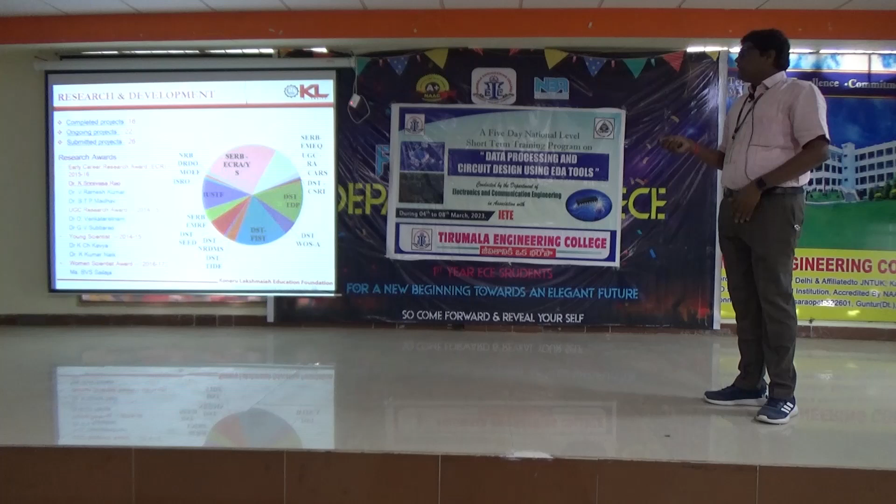So we are the leaders for these specializations, and we have a head of department. After the head of department there is a principal, and after the principal there is a VC. The department is meant for research in KL University.

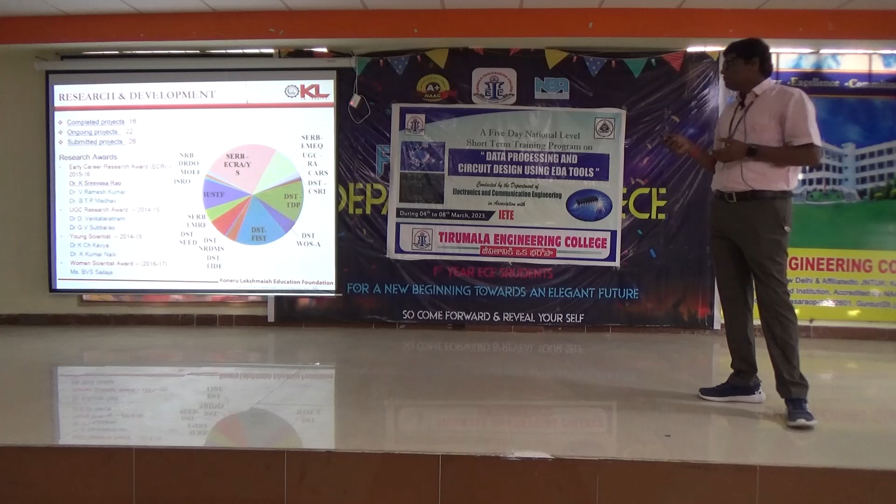The EC department is purely research oriented because we have so many faculties from IITs, faculties from NITs, and faculties from other institutions. So we have huge research projects in the department from different funding agencies.

This is about my department, where I am working, that is my habit to discuss. Wherever you go outside, you will discuss about your family, right? So my institution is like my family, and wherever I am working, I should always represent my institution.

After that, let us discuss today's talk, which is about the nanoscale transistor. And I always believe this statement about research.

What is research? Maybe you are at second year level, third year, fourth year, or maybe PG level. Research is not something entirely new. The students we have in our institutions, third year students are doing a lot of research, working on many different kinds of projects. Final year students are also working on projects.

Research is always about seeing what everybody else has done, what others have done. We should know about what others have done, and we should be in a position to do something new which is not done by others. That is research.

It is not something like an innovation which is not available anywhere else. No, it is not like that. The transistor has been there since 1947 onwards. Still we talk about the transistor, and we say we are doing research, meaning the transistor is the same but inside we are making some modifications. So making small changes in the process is also research.

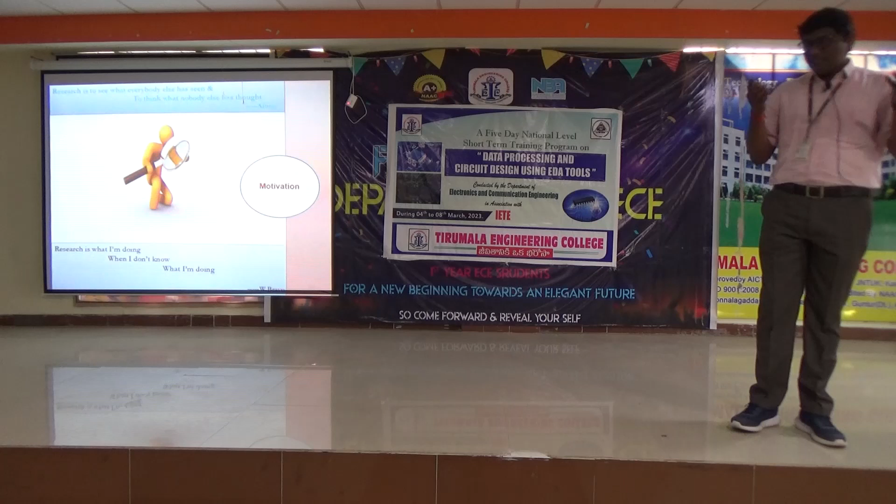Research is also what I am doing when I don't know what I am doing. My scholar here, once upon a time he was a faculty member here, Mr. Shaukat Baliga, joined for PhD and worked for some time. He did not understand the problem, but now he is in a position to understand his problem and understands what research is and everything.

And he is the senior professor in the department, though it is now headed by others. We used to take inputs from people. He is the man from IIT Kharagpur, and he is the knowledge hub.

If you use it, you will get the knowledge. If you can't use it, then wherever we see, it depends upon us how we can utilize the services, how we utilize the resources. If you feel others are waste, we are waste. Simply, if you are learning something from others, definitely you are learning something new.

Last day, two professors came from NIT. They are from NIT, I am from KL University. If you feel like, I am waste compared to NITs, I am not in the NIT category, I am in a private institution. But what you need to see is what they have taught, what I am teaching, what you learn from them, what you learn from me is the matter.

Institution is only the label.

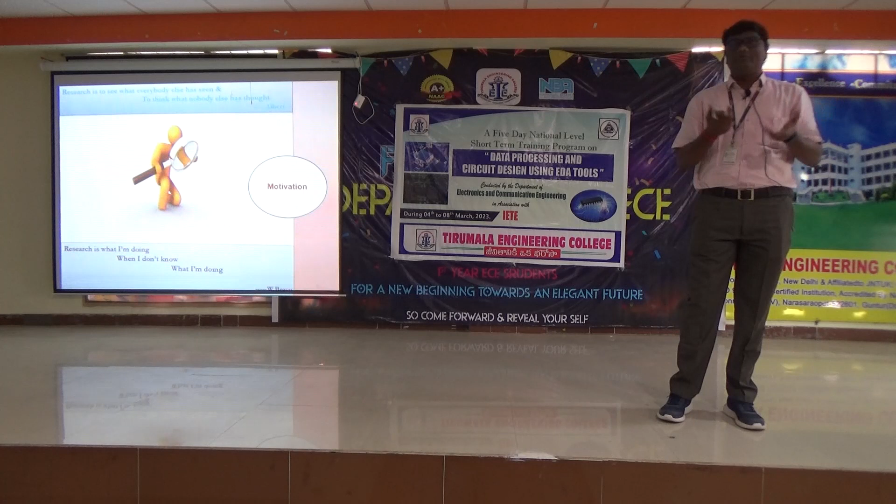Tomorrow you will go outside, you are from TEC, and some people joining the same industry will be from IIT. No issue. What knowledge you have is the matter, obviously. Due to so many circumstances, you are joining here, otherwise you could be there in NIT or IIT. Every person, everything in the universe is valuable and is a matter. I always believe that, and I convey the same to my research scholars and my students.

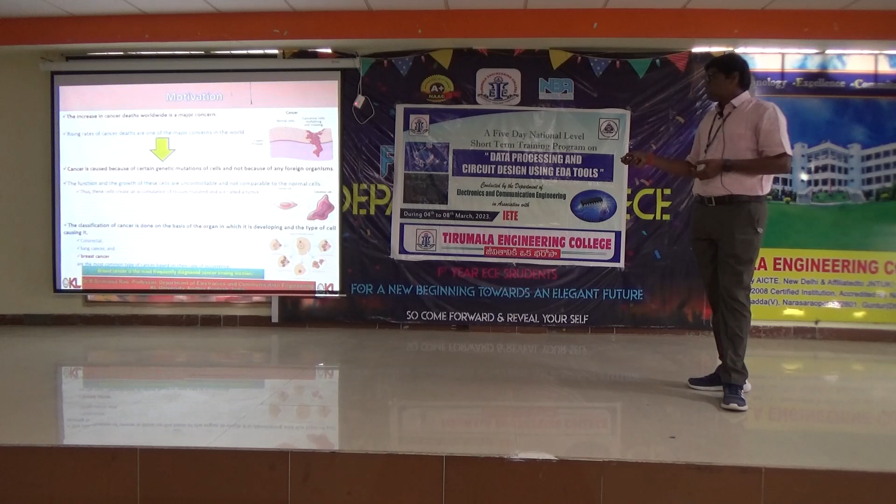So this is the problem. This is the human tissue, the human body tissue. If you cut, you will see both the layers. This is the normal layer where the cells are in a regular pattern, and this is another kind of tissue. There is one line, which is the barrier. We have a skin, and inside skin there is one more skin, and inside that there is one more skin, and after that there are so many nervous systems. So these are the tissues.

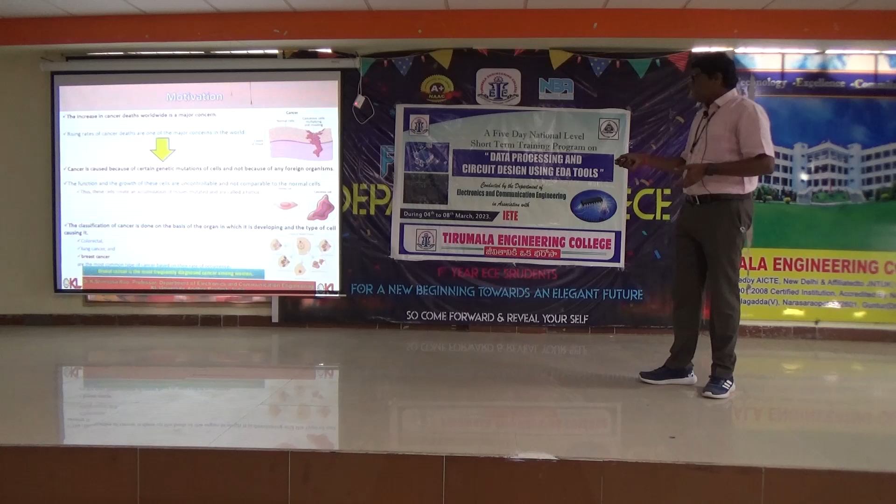If you have a tissue like this, no matter, both tissues are good, they are working properly. Your blood circulation, everything inside is good. But if you get this kind of disorder in the tissue, it is affected by some kind of mutations in the cells. Some kind of virus, or some kind of unwanted cells, are there in between these two tissues.

So in the human body, when we have this kind of problem, we can say that the human body is facing cancer. It may happen in so many parts of the human body - in the lungs, or other locations, which is the main concern in the overall world. Getting solutions to detect these kinds of cancer cells is the main concern in the world, because the death rates are increasing like anything. There is no pure solution for such a disease that affects the human body.

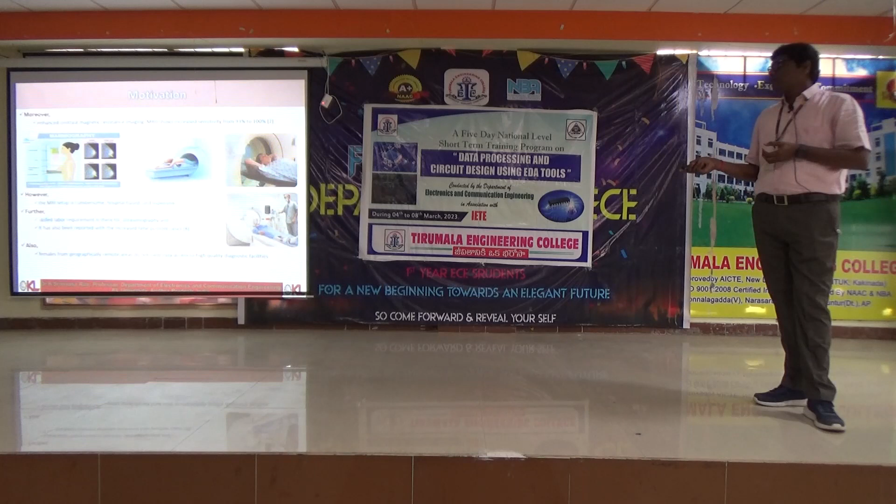Understanding all these difficulties in this process, being an engineer, there should be some kind of solution required for these problems.

Usually when we face this problem and go to the hospital, they do the X-ray mammography. After half an hour, they call you for the report discussion, and they get these kinds of images. From these images, the doctor understands whether the cell is present or not. If any signal processing or image processing people are here, they can understand the image—but a lot of knowledge is required to understand it. Based on this, the doctor will give you some kind of suggestions.

Sometimes during this experimentation process there will be false reports also—reports will come with some other name or other mix-ups. So this entire process is cumbersome, and patients get a lot of doubts about whether the report is correct or not. All this created some limitations of the present hospital processing.

This is expecting something from the engineering background—some kind of portable device for the same cause. It may not give you 100%, but some kind of portable device is expected in society from the engineers. Therefore, transistors can do this job—the transistors we are studying, which are tunnel-based transistors, in short called TFET.

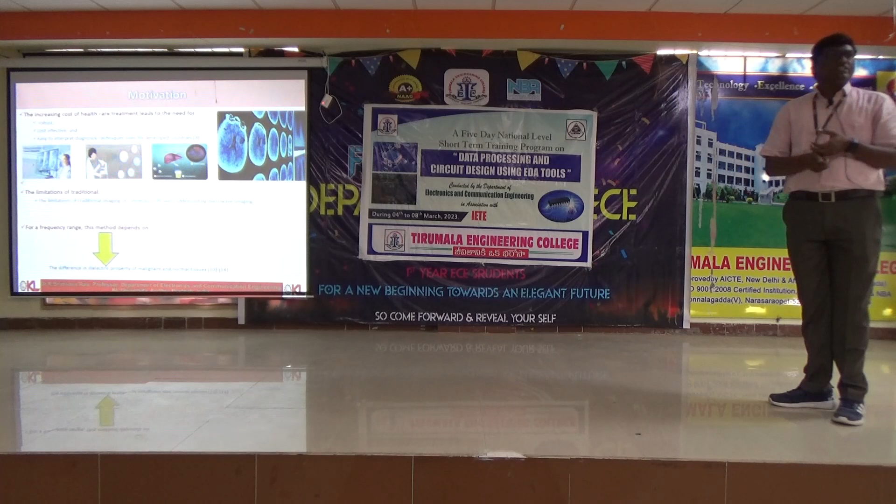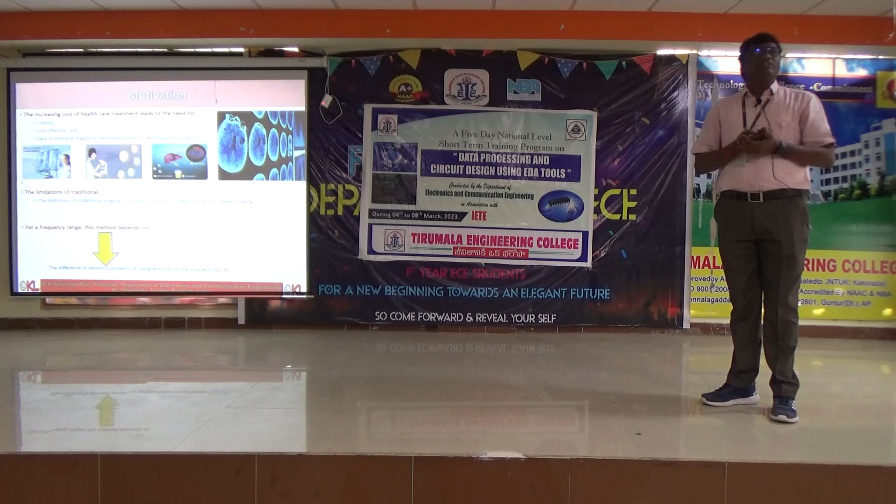So here these images are coming and these are connecting with the frequency range. X-ray mammography can process a lot of samples. Every sample is not the same - some samples have different kinds of tissue thickness. Depending upon the thickness, they go for different kinds of radiations, and if they go for different radiations, the frequency will be different.

From this experiment, it is already proved that breast cancer tissues are exposed to microwave radiation. If you pass microwave radiations, these can be detected. This is already experimentally proved.

From that we understand that whenever we have a cancer cell, it gets more water content. Therefore once the radiation falls on this particular cell, it will be scattered - the scattering will be more when radiation passes through this tissue. Whereas a normal tissue has less water content, so when the radiation goes through, it will not be scattered much.

So the easy understanding is: microwave radiation goes and falls on the sample, and immediately technicians can observe the radiation and its scattering. If there is more scattering, it means there are some sort of cancer cells there. If there is less scattering, that is a normal tissue.

Depending upon the processing of this scattering of radiation, they understood that normal tissues have less scattering and cancer tissues have more scattering. More scattering means the permittivity and other electrical properties get changed because of the radiation passing through the cells. So the entire cell's properties get changed, and among them one property is the frequency, which connects with the dielectric property.

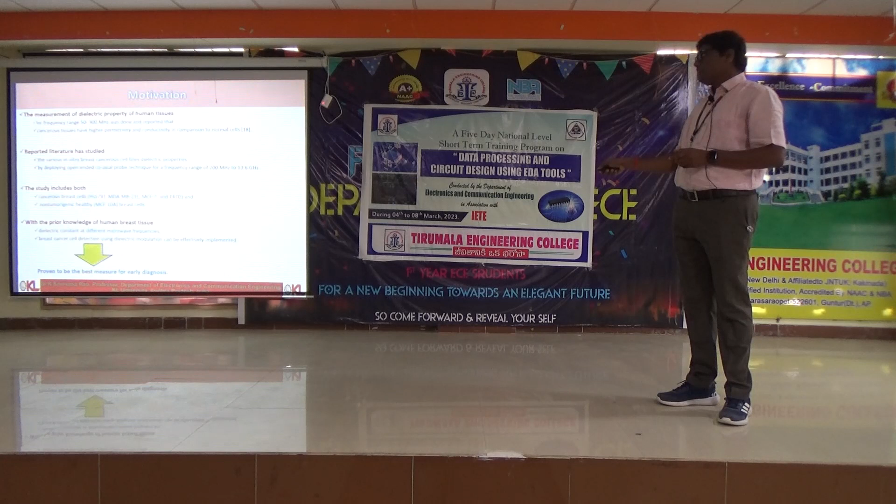We have taken the help of experimental data, and we have used these cancer cells: breast cancer cells like HS578T is one type, MDA MB231 is another type, and MCF7, T47D - these are 4 different types of cells we have taken into account for this experimentation, already mentioned here in reference number 18.

It is already experimentally proved that at this particular frequency, these particular cancer cells have been diagnosed, and also the normal cell - if it is the normal cell, this is the normal. We have taken these 5 kinds of cells, normal cell and breast cancer cell.

We have used our particular nanoscale technology with the help of the transistor, and we have diagnosed our cancer cells with these, and whatever transistor we proposed with some architecture, that is the best way one can get the solution. That is the entire way of our research.

Why are we going for the transistor? Because a transistor is very small. Nowadays it is available in terms of nanoscale, meaning very small. When we go for miniaturization, then the cost of the device will be reduced, and you can move with the device.

Earlier laptops were not available, very big computers were available for the same purpose, and we could not move. Now we go with mobiles, tabs, laptops. Laptops also - Samsung will have one kind of weight, and Intel based or iPhone based, they have one kind of weight.

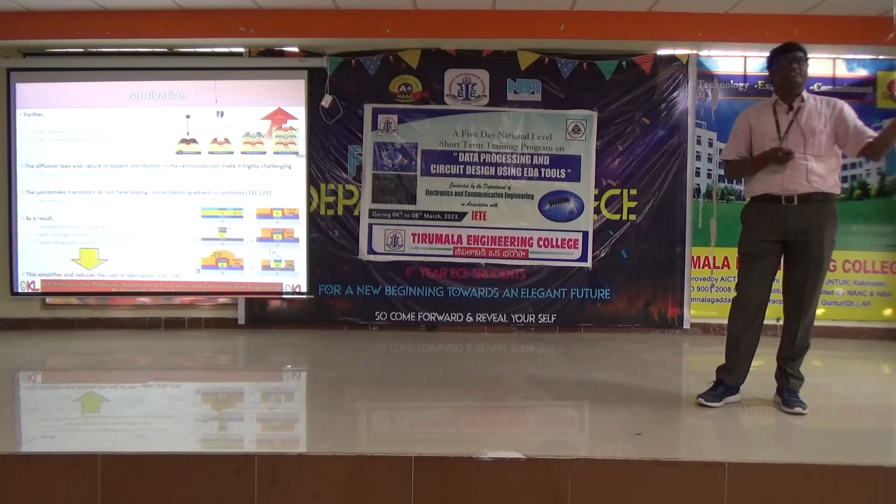That's why here we are going for transistors for the purpose of identifying or detecting cancer cells. Already X-ray is there - the X-ray machine itself is almost half of this dias, the equipment itself. So instead of that, we are going with one transistor, what we normally see in the labs also - transistors. Not exactly the same, but it is the same kind of device.

So 10 nanometer size, the channel length is 10 nanometer, 7 nanometer, 5 nanometer, people are doing. Such a small scale device being able to detect such very dangerous cells is the innovation - it is the research.

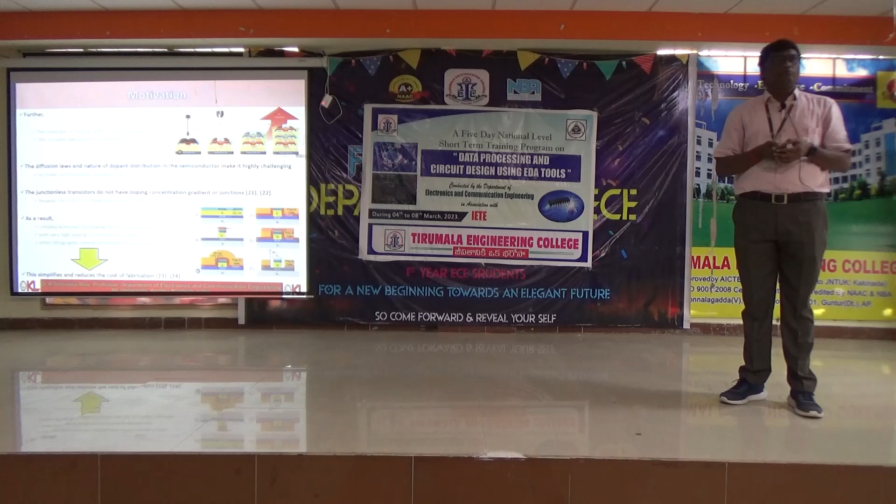That is actually our main intention, and in this process we have used CMOS technology like lithography, oxidation, etching process and all to make our device, but we are not doing it experimentally. The device is considered on CMOS technology basis. We are assuming some kind of architecture and we have simulated and designed that.

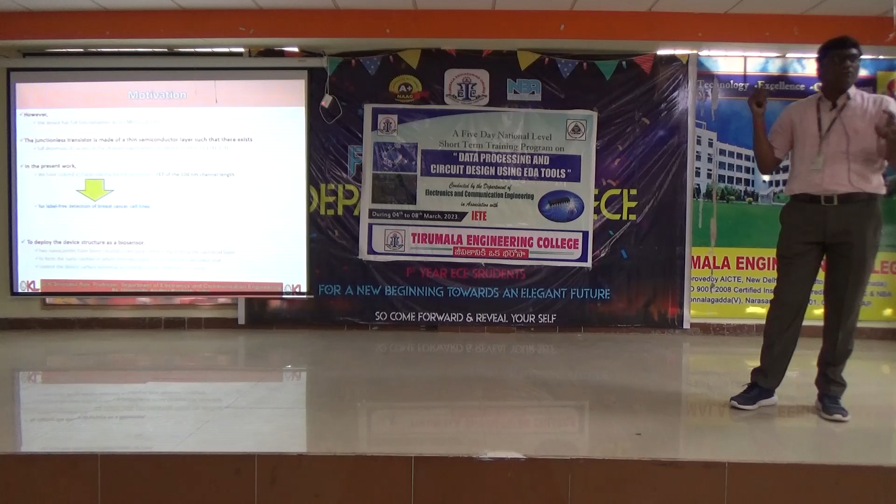Experimentally in the EDC lab, you must have a diode, you must have a transistor, and you give input and test the output. But here, we are not doing any experimentation. We have taken the data from the experimentation and we are using the software tool, which is the EDA tool. The title of your seminar is also the EDA tool - electronic design automation. So we are using this EDA tool here, and we are making this junctionless transistor, which is based on the semiconducting layer.

The device will be on condition and off condition. Whenever it is on, how is it going to respond when you give some sample as the input? We are not giving only the input voltage and output voltage or output current. We are giving some sample into the device, and the device is sensing it and providing the output. That's why this transistor is called a sensor, because it is sensing. This is the process we have observed.

So we are taking a sample from the human body in terms of blood and other forms, and we are considering that as the biomarker, and that is the sample. The sample we are injecting into the device. This is the transistor device.

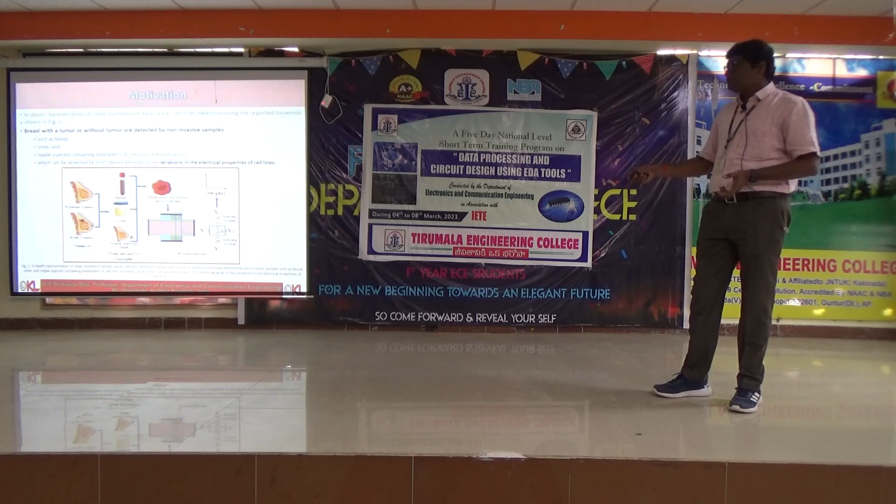And if you look into this device, this is the design of the transistor, and this is the proposed architecture. One can make the design in multiple ways. I can take source and drain, with the channel in between. Somebody can take drain and source arranged differently - drain on this side, source on the other side.

And somebody can take the oxide layer as HfO2 on both sides. Some people can go for silicon oxide, or tin oxide, and so on. So there is no limit for the design. As an electronic engineer, you can design your device as you wish, but ultimately your device has to respond to the purpose.

So here my proposed device is junctionless because there are no junctions. There is no junction between the source, drain, and channel. And the cavity is formed here. You can see this is the cavity where we can inject our sample.

We have cavity on both sides. We have a gate at the top side, that is the front end, and a gate at the back end. That's why it is called the dual gate or double gate transistor. You can make the transistor single gate, double gate, or multi-gate, which is called the nanowire based transistor.

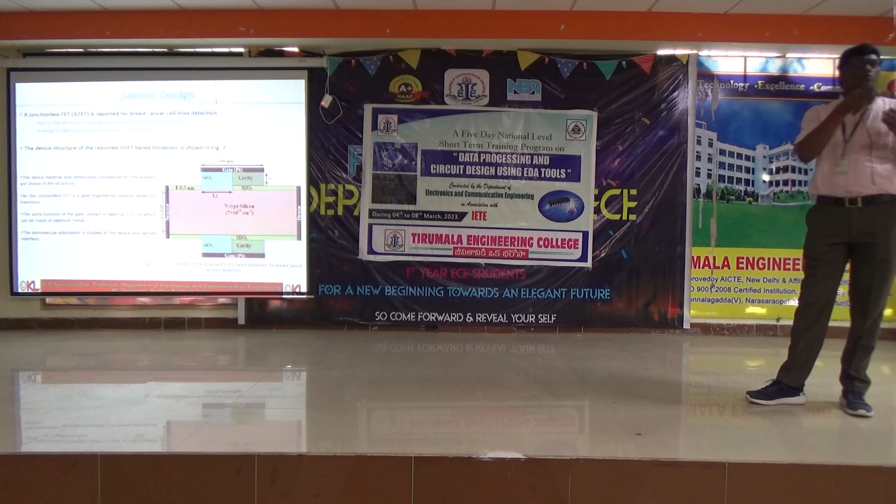Your gate will be surrounding the channel, which is called gate-all-around. So as you apply gate engineering, you are going to improve the output of your device. When more gates are used, controllability will be more, therefore your device will work perfectly. That's why I have used 2 gates here.

One can also use a single gate. The dimensions are mentioned here: 100 nanometer length is the gate, which has the cavity at 50% and oxide layer at 50%. Both sides we have done the same. And we have the oxide layer, with thickness of 0.5 nanometer. You can give 1 nanometer, you can do 0.6.

From the literature, it will come to our mind how much we provide, therefore we will get the better results. So based on that knowledge, we have given proper dimensions to the device. We have designed the sensor.

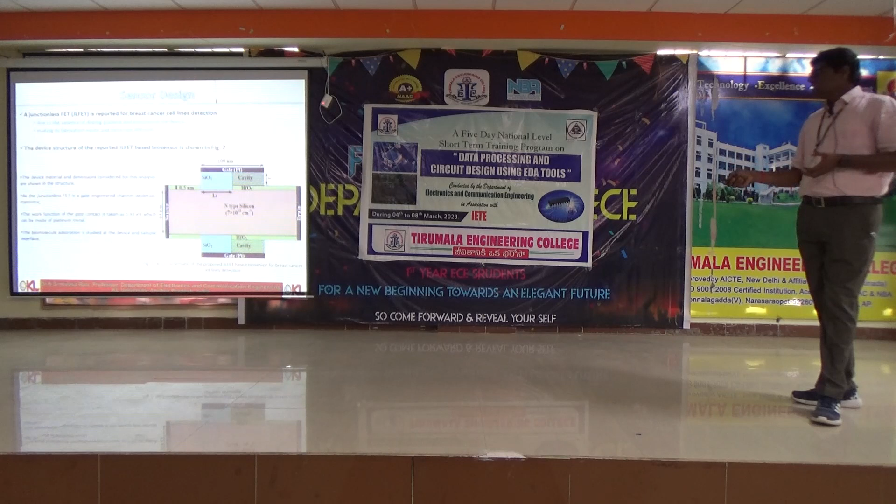This is acting as a sensor, and we have seen the output of the sensor. We have applied several models. The green dotted lines provide the experimental data, which is already reported in the literature. Some people have done this: if they use gate voltages from 0 to 0.7, they get this drain current. What we have done is simulate with the TCAD tool, Atlas TCAD tool, and our simulation results are shown in blue color. So our simulation results are very much mapped with the experimental data.

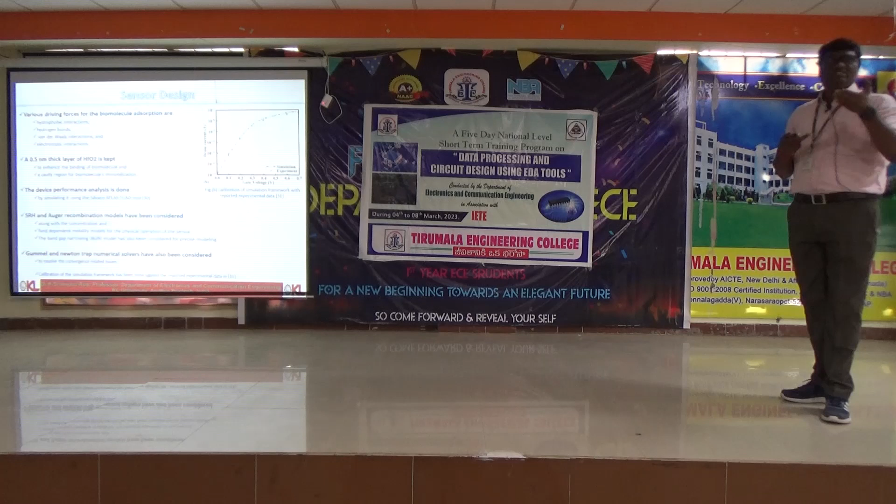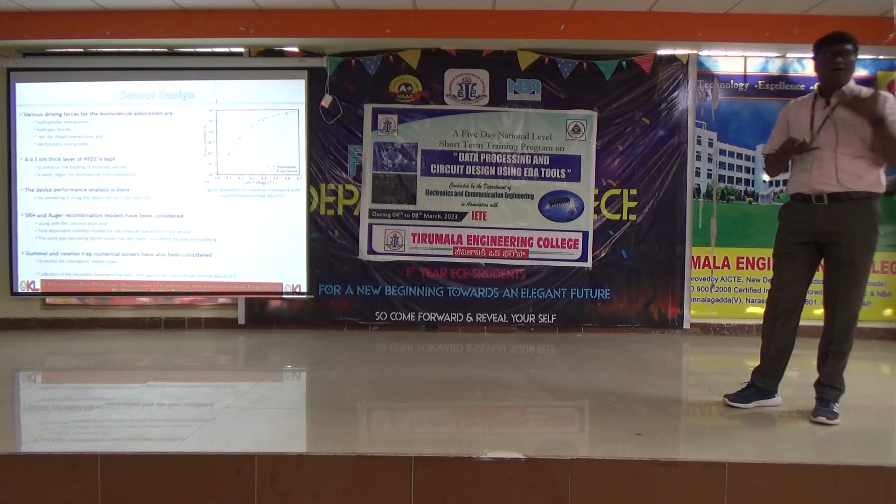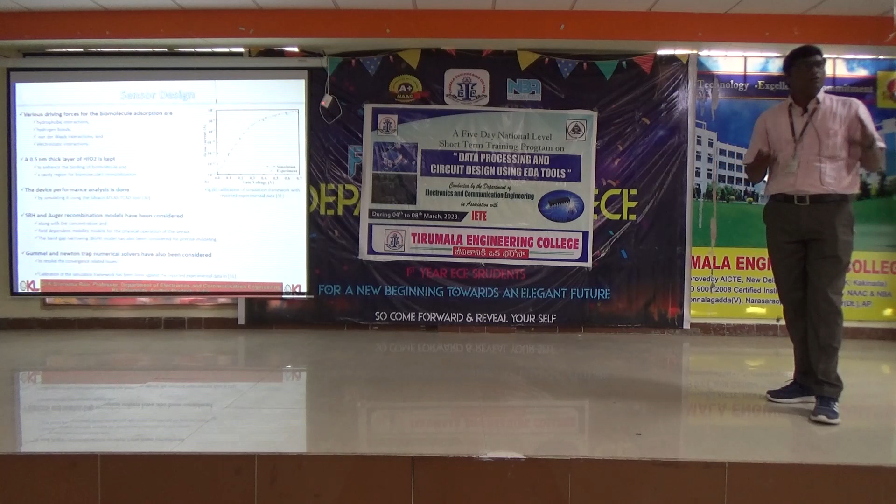Therefore, whatever architecture we have proposed, this architecture is having some meaning. If it is not mapped with the experimental data, then there is a bigger difference between the experimental data and our simulation data, meaning our proposed device is not perfect. So our proposed device, after so many simulations, our final architecture's simulated drain current data, which is one of the characteristics of the transistor, is mapping with the experimental data. So we have confirmed that our proposed transistor is the perfect architecture for detection of the cancer cell, because it is mapping with the experimental data.

And the dimensions we have taken, all these were changed a number of times through lots of simulations, and after that we have confirmed that the proposed device is able to detect these kinds of cancer cells.

If you have a cancer cell, the dielectric property of this particular cancer cell is K equal to 22. This cancer cell's dielectric constant K is 24.5. And this cancer cell is 32, and another one is 27.5. That means cancer cells are so many in the human body, so every cancer cell has its own dielectric property.

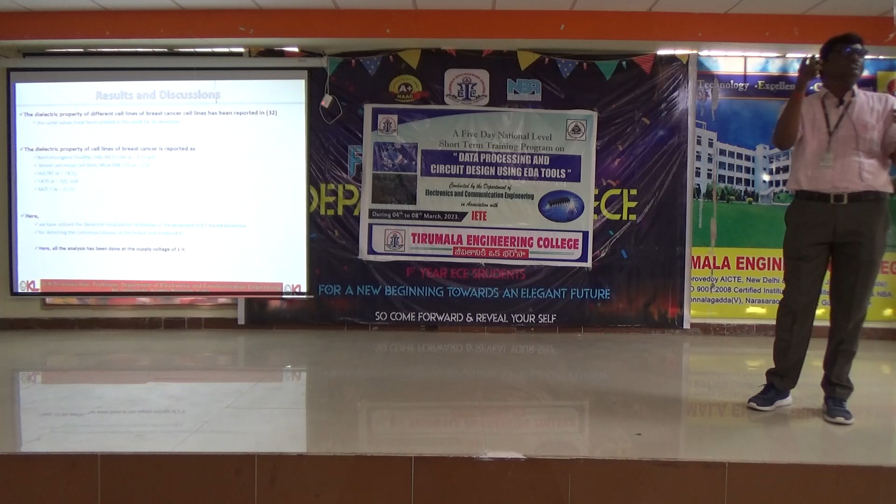If you know the dielectric property, you will get some kind of transistor that is able to detect it. If the dielectric constant is changed, you need to change the architecture of the transistor. In this process, we have taken these 4, and our proposed device is able to detect all 4 types of cancer cells and also the normal cell. The normal cell's dielectric constant is 4.5.

For your information, during the COVID situation, there were no solutions initially from the electronics point of view, but later they got some kind of solution from electronics to detect these cells. One of the solutions from the transistor point of view is that the coronavirus's dielectric constant is understood to be 4.1. Based on this dielectric constant, researchers made an architecture of the transistor, and later fabricated and published it in the market, and it is now available abroad.

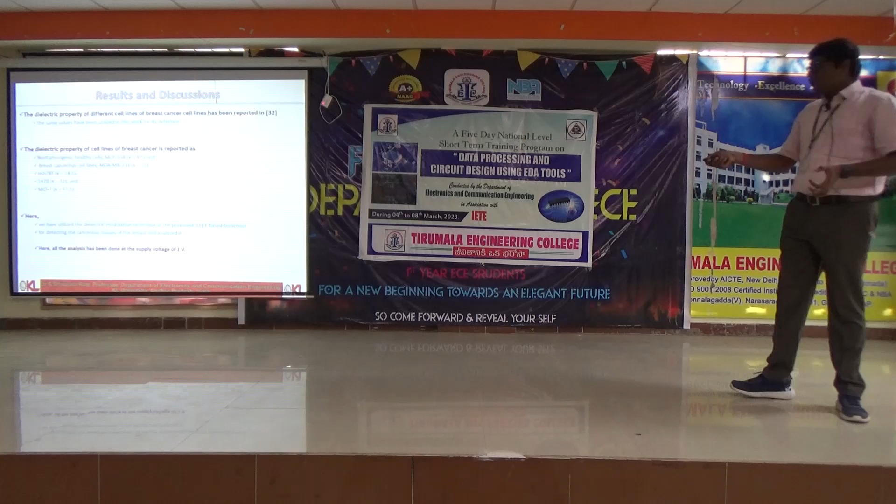So the coronavirus's dielectric constant is very, very less, so it doesn't require any radiation to stop it. That's why there is no radiation-kind technique used for coronavirus detection. Whereas breast cancer cells have a very high dielectric constant, which connects with radiation.

In this process, we have designed our architecture and seen that if you change the cavity thickness, you can detect more and more types of cancer cells. What we saw earlier, the cavity thickness was 5, 4, and 3. We observed that the potential changes, and the potential is good for cavity thickness of 5. Therefore, 5 will be a good solution; you can take 5 as the thickness of the cavity. So we finally optimized, but before optimization we had to come to a conclusion based on the results.

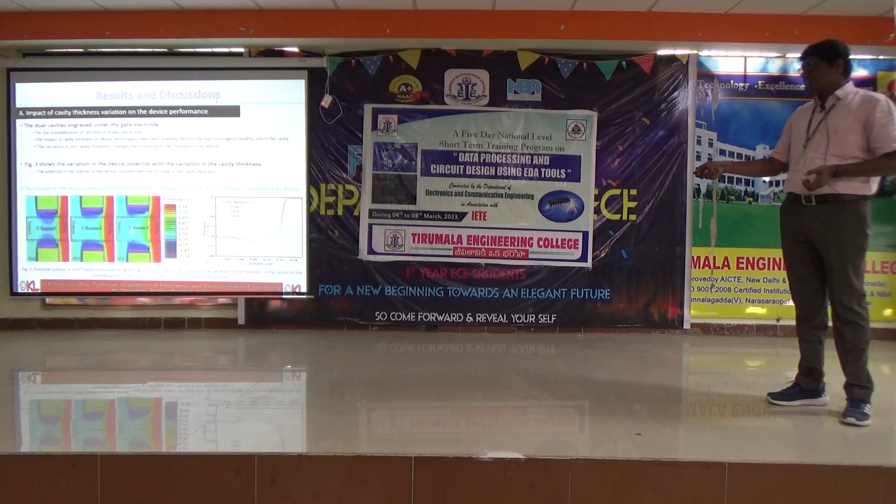Here you can see how the electric potential is formed inside the channel. If the cavity length is 5, 4, and 3, the potential compared here is less, and compared to here the potential is less here. So the potential is very, very good when the cavity thickness is 5. So we have fixed the cavity thickness appropriately. And also with the same dimensions of cavity thickness, we have seen the energy bands, the valence band and conduction band.

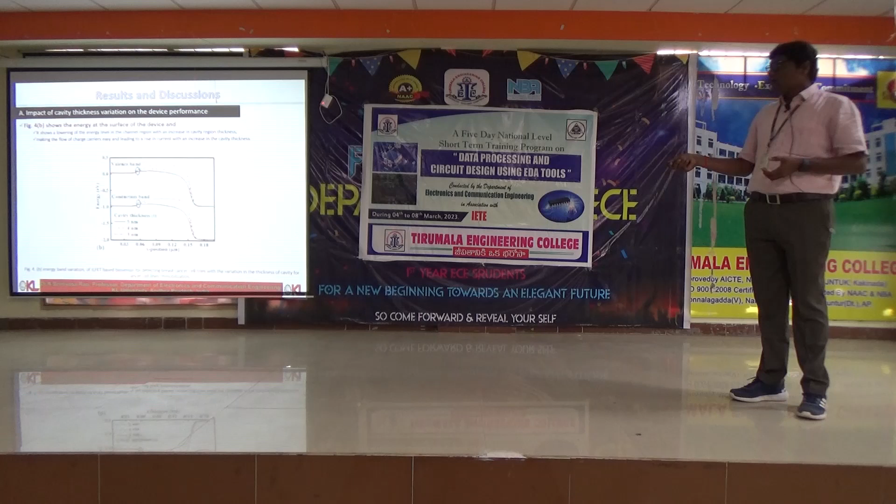So that valence band and conduction band relation we have seen for the 5 nanometer cavity thickness, 4, and 3. And 3 is providing the best tunneling. The tunneling capability is good for the thickness of the cavity at 3.

Also we have seen the drain current, which is the most important one, the output of the transistor. We have seen the drain current for the 5 nanometer thickness, 4, and 3. All these, the electric field, energy band and drain current, will provide fixing of the cavity thickness among 3, 4, 5. We have fixed the thickness which is ultimately providing the better results of all these 3 parameters.

So we can conclude that for the parameters of 3 nanometer, 4 nanometer, 5 nanometer cavity thickness, the current, Ion by Ioff ratio, transconductance, subthreshold swing - among these performance parameters, for 5 nanometer the ion current is good, that is 0.431317 milliamps per micrometer. So when we are expecting more drain current, this is good, that's why we have fixed the 5 nanometer cavity thickness.

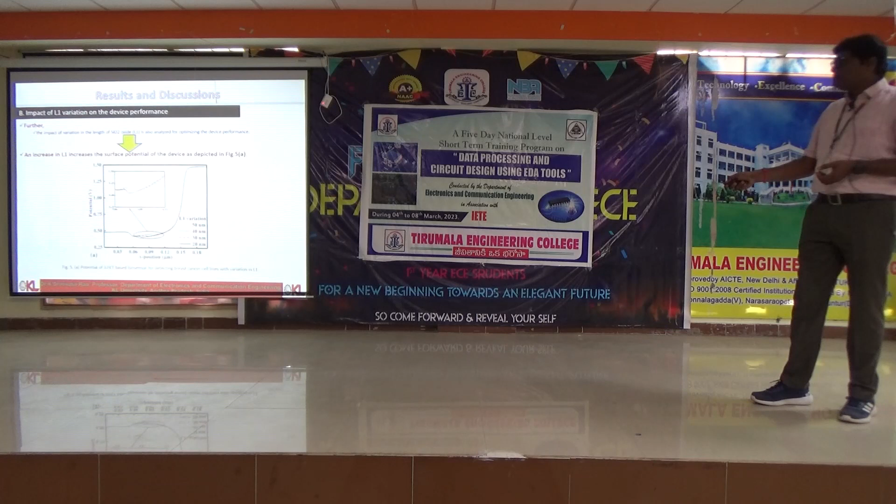And also we have changed the variations of L1, which is the thickness of the oxide layer. The thickness of the oxide layer considered here is silicon oxide, and we have changed the silicon oxide thickness. When it is increasing, surface potential is increasing. You see 20 nanometer, 30 nanometer, 40 nanometer, 50 nanometer. Going from 20 to 50 nanometer, the 50 nanometer is having a higher potential, which you can observe here from the green.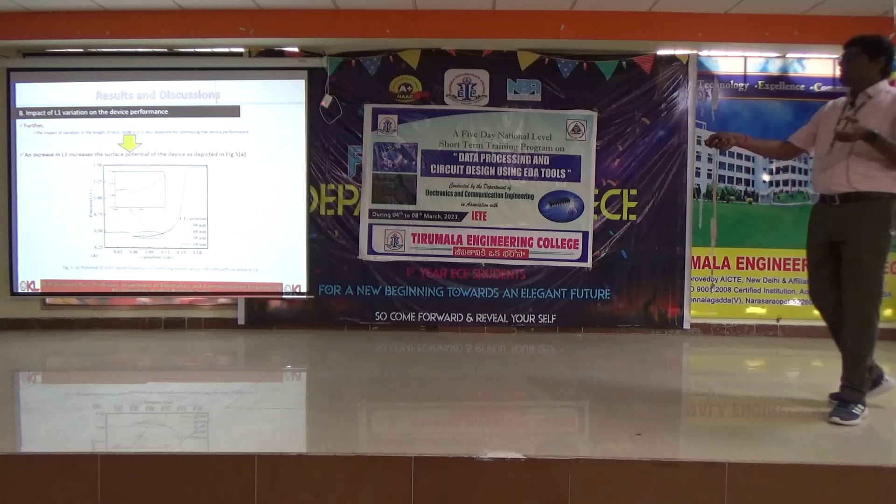So one is cavity thickness, the other is oxide thickness. So oxide thickness should be approximately 50. And for the same, the energy bands also seen - the energy bands for 50 is good, and also we have seen the drain current similarly, which is also providing better results for 50 nanometers. So 50 nanometer oxide thickness and 5 nanometer cavity thickness is fixed, and we have designed the device. So when we compare the thickness of the oxide layer 20, 30, 40 and 50...

Ion current you see is 0.4313, and for 50 nanometer it is 0.4323. Maybe in terms of the floating point it is very small, but in terms of the current it will play a vital role. So we have fixed the 50 nanometer thickness of the device.

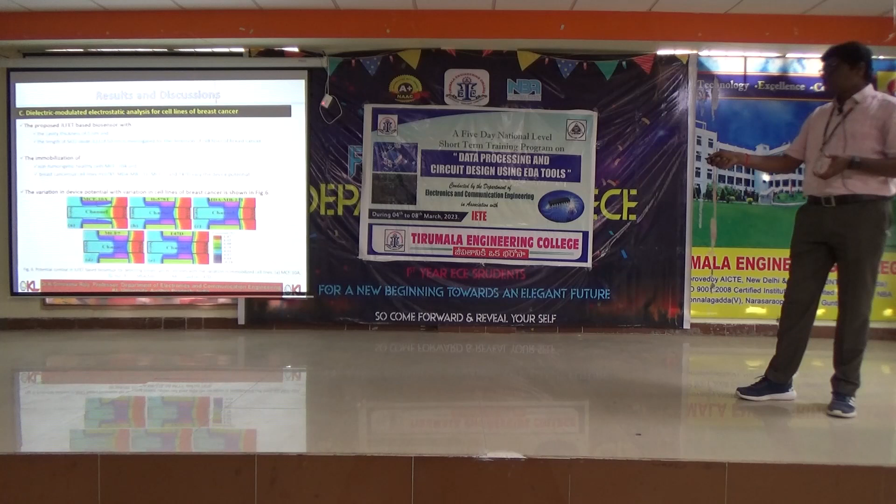And then we have also seen the dielectric constant, what type of dielectric constant will detect this particular device. In this process we have taken 5 types, and for all these 5 types we have seen, when we have the cancer cells and the healthy cell, we have seen potential energy and the drain current. And we have noticed that the healthy cell is having less current. Whenever cancer cells come, the transistor is detecting that the drain current is more, because the dielectric constant of the cancer cell is more than the healthy cell.

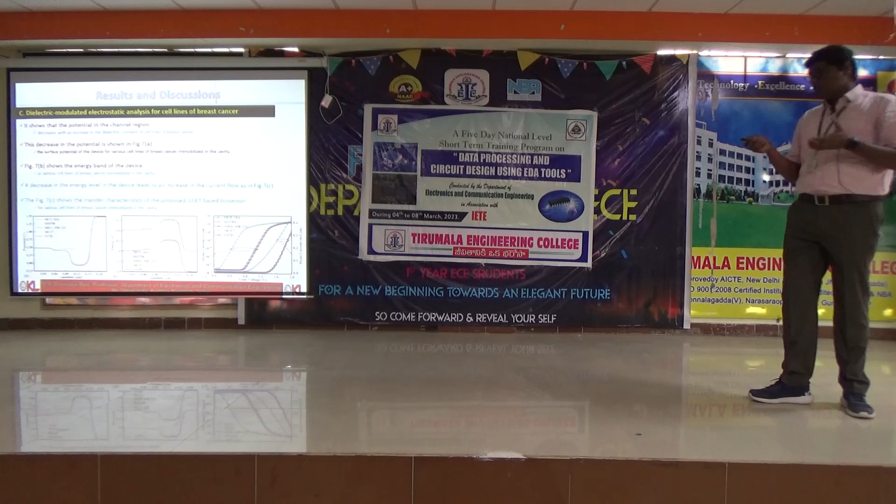Your healthy cell is having the dielectric constant 4.5, and your cancer cells are having 22.5, 24, 27 and 32. So when dielectric constant increases, your drain current increases. So that provides a path for identifying the cancer cells in the sample. The drain current, that is the sensitivity of the drain current, was also seen. Sensitivity is also good when cancer cells are present. Our device is providing high sensitivity.

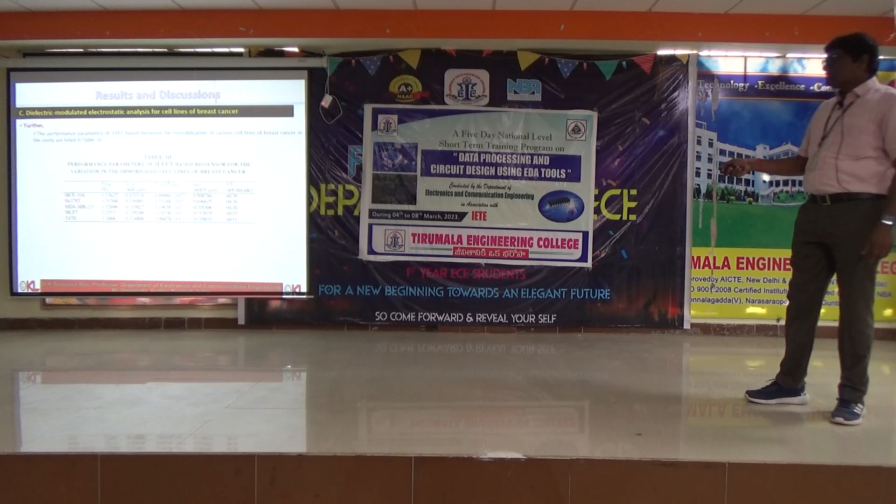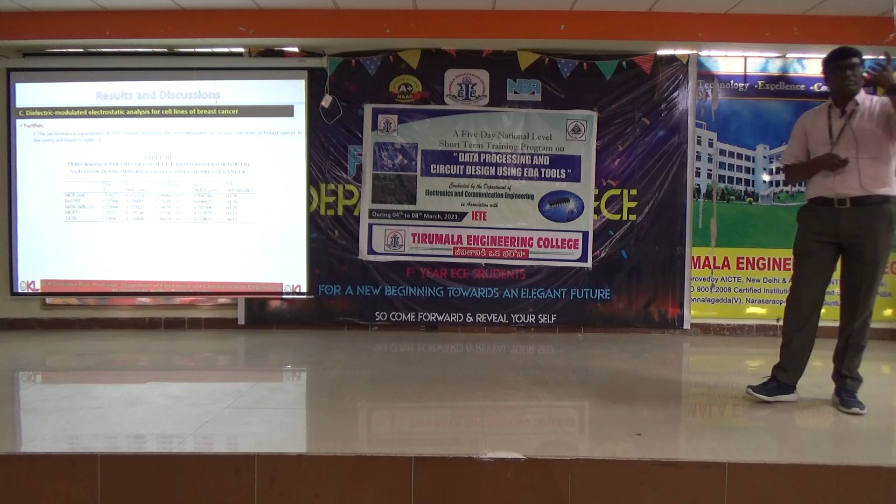And we compared when we have a healthy cell versus cancer cells, the device parameters are changed. Particularly, without the cancer cell versus with the cancer cell, there is a difference - a difference in the threshold voltage, a difference in the transconductance, a difference in every way. So that means your proposed, simulated device is perfectly doing the simulation of your samples.

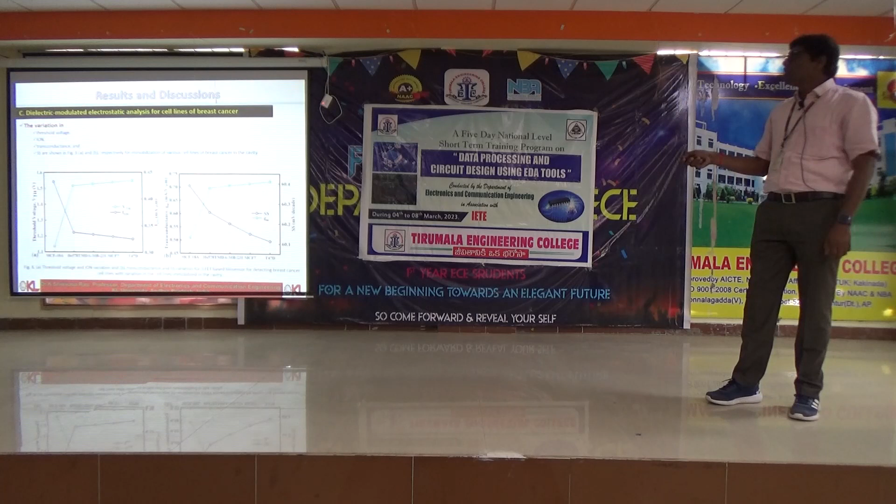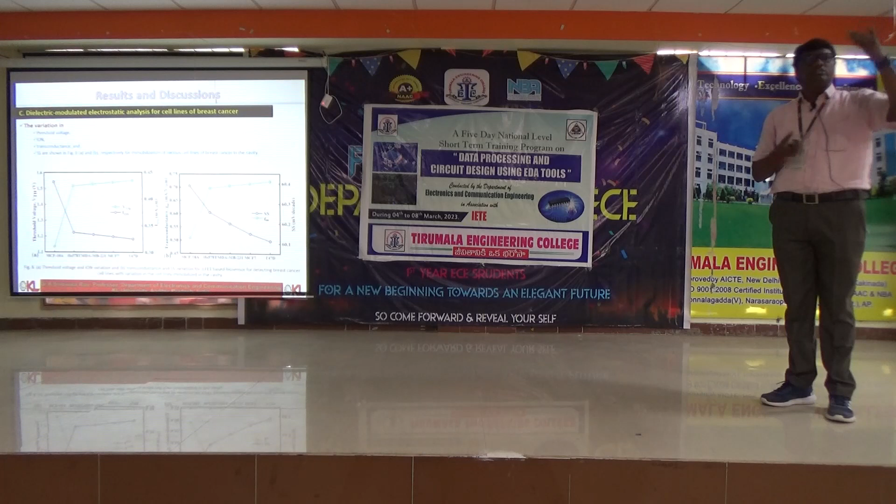And also we have changed the dielectric constant for the threshold voltage, for the ion, transconductance and other purposes. In every way it is showing that when cancer cells are present, your device is providing better sensitivity. So your transistor is responding and providing high sensitivity, meaning your sample is having the cancer cell. In this process, you can take more and more samples and test them with the help of this particular transistor.

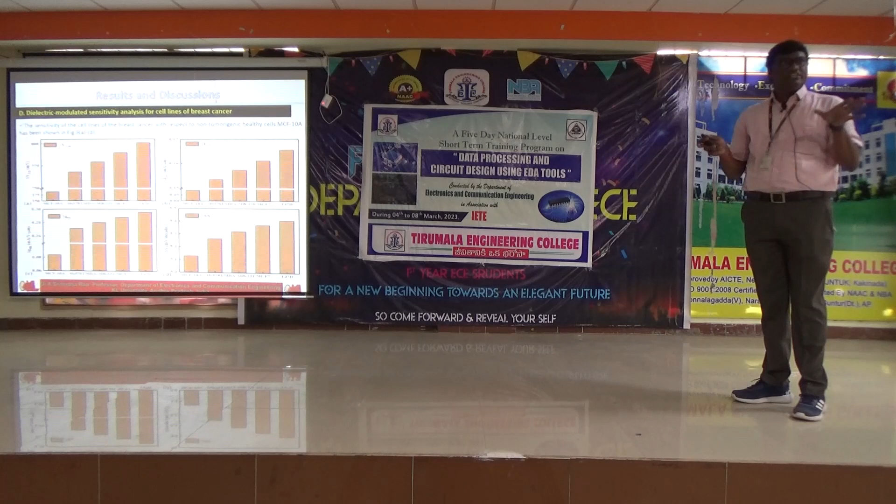As this particular work is limited to simulation, we see here the threshold voltage - delta VTH is the sensitivity of the threshold voltage, delta ION is the sensitivity of the current, delta GM is the sensitivity of the transconductance, and delta SS is the sensitivity of the subthreshold swing.

So everywhere this is the healthy cell, these are the cancer cells. In every case, for every sensitivity parameter, the healthy cell is having less sensitivity, while the cancer cells are having higher sensitivity. Particularly this T47D is having a much higher sensitivity compared to the healthy cell.

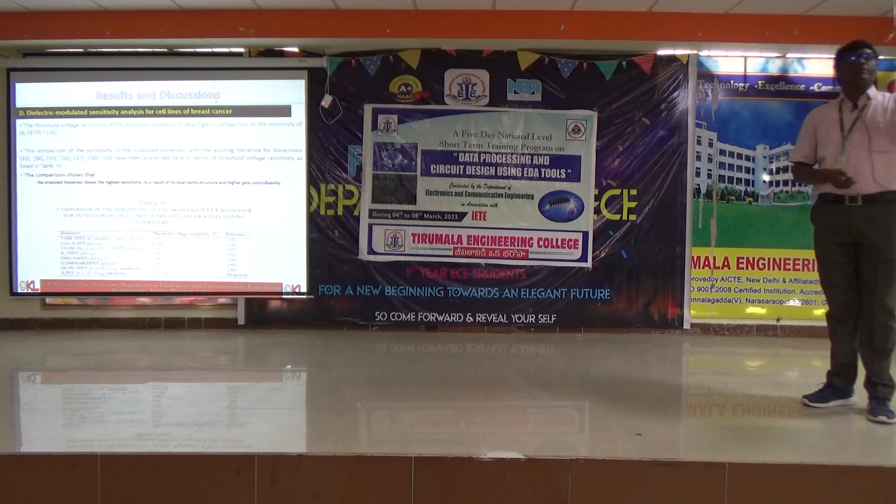This particular information belongs to one kind of cancer cell. We are not dealing with anything experimentally, but with our proposed device we are able to detect these particular samples. This means whatever device we have proposed can be fabricated. Once fabricated, whatever results we get theoretically, we will get the same data experimentally. So the proposed device is able to detect even experimentally these cells.

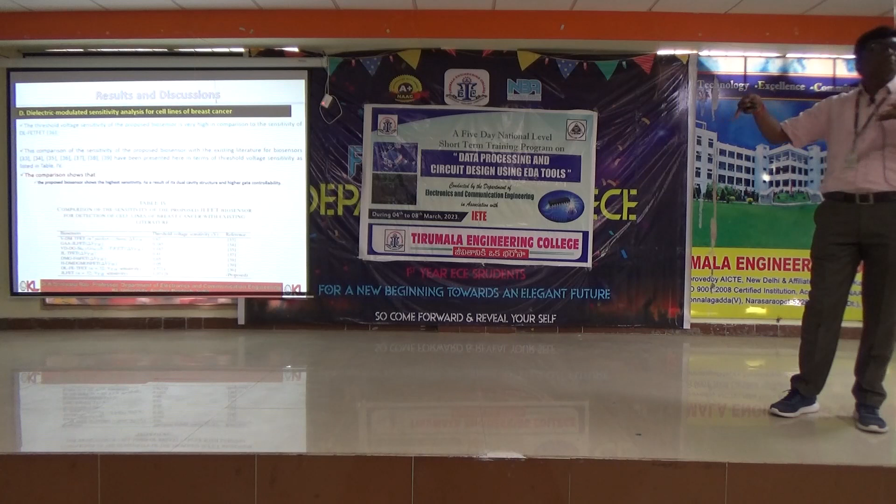Whatever cells we have mentioned, and the proposed device architecture, we have compared with other members. Before us, many people have done it and proposed their architecture, but their architecture is different. For example, our college building is like a C shape, while some other engineering college building will be in L shape or U shape or C shape. Architecture is something different. Our device is like what I have shown, and others' device architecture is not like ours.

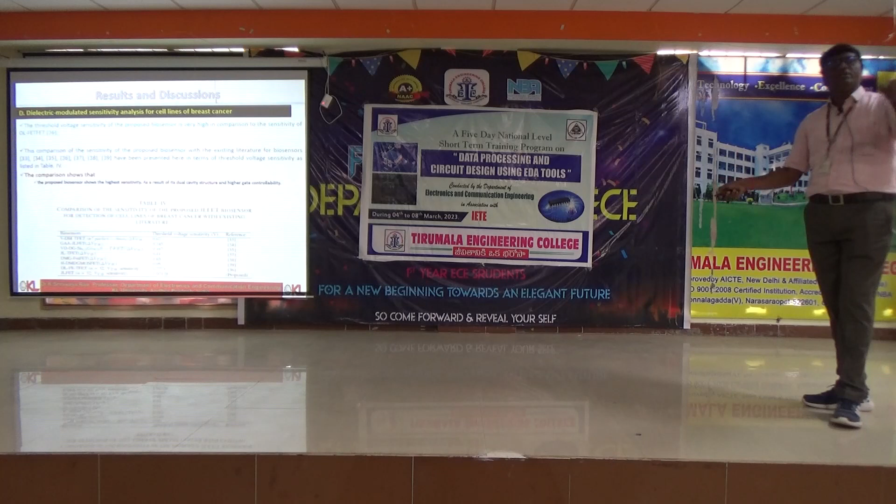Because of our architecture, we are able to improve the sensitivity compared to these other people. That means our proposed device is the best among the many already reported. Compared to others in society, what we have done is always better, it should be better. Then we can proudly announce that this proposed device architecture can be recommended for fabrication, and that fabricated device can detect the breast cancer cell.

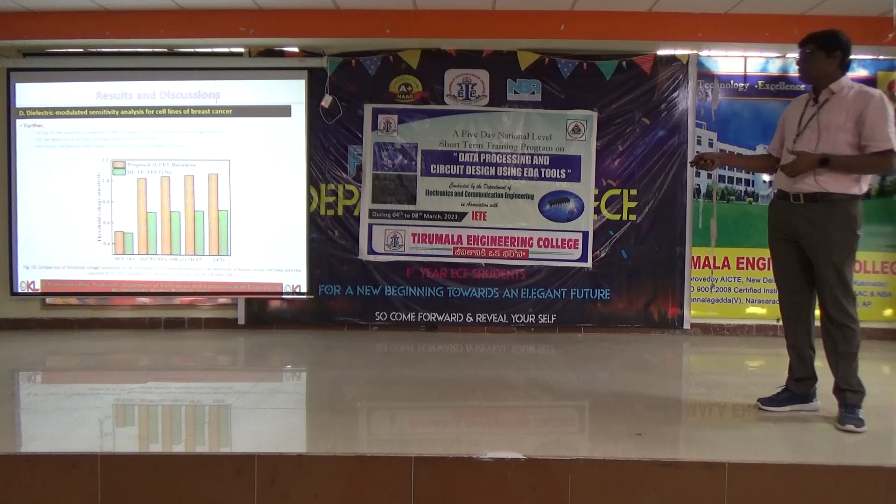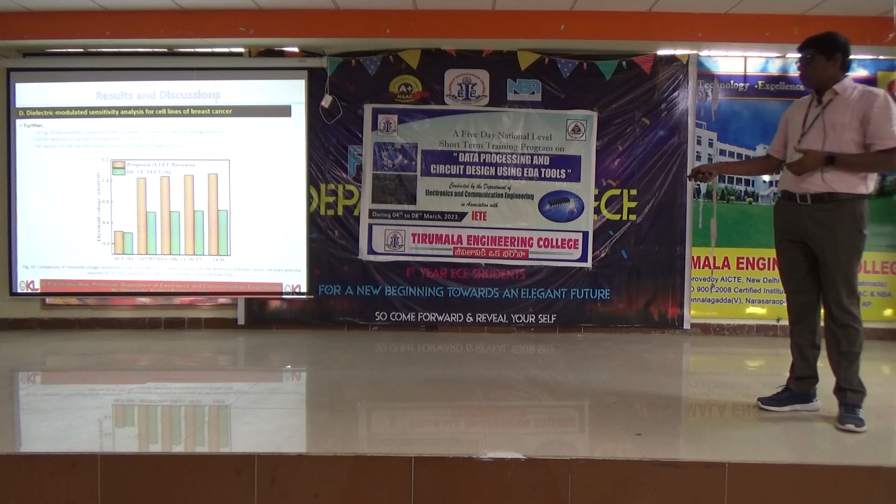We have compared our device with one of the recently published works, reference number 36, across every cell from healthy cell to cancer cells. In every way, our proposed data is far better than the previously existing data.

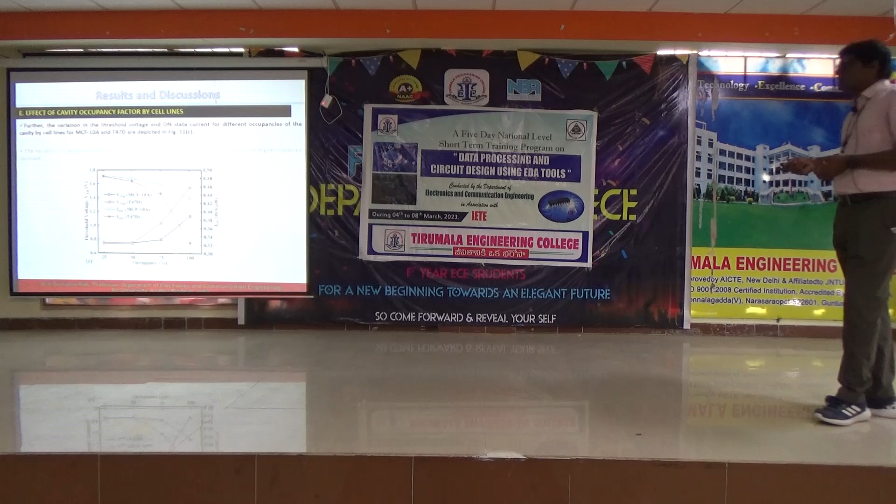So based on this, the conclusion of this research work is that there is a requirement for detecting cancer cells for these 5 samples, and in this process, being an electronic engineer, a transistor can be designed. Therefore that transistor can identify the cancer cells.

Later on you can compare your work with experimental data. If your work maps with the experimental data, you can fabricate it, go for the patent, and release that device into the market for commercial purposes. That is the overall summary of my work.

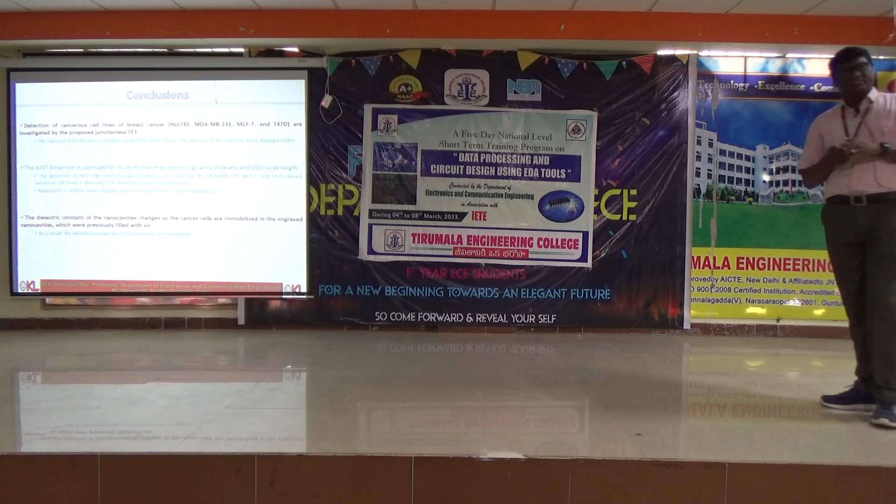We are currently in the phase of designing and comparing with others, and now we are going for fabrication. For fabricating this, we require a clean room, which is a very highly sophisticated laboratory available in very rare places. With the help of a collaborator, in future maybe we will fabricate it, and therefore real samples are also not available.

So if I ask you for a sample, will you give it? You cannot. So we have to approach hospitals and get the particular patient cancer samples, and later these hospitals and the fabricated device should collaborate, so that real-time experimentation can be done. This is a huge job for the researcher, because it is not possible within academic institutions alone.

That's why we are having a collaboration with hospital doctors, and we have already shown this discussion in the AIIMS at Mangalagiri. Once we fabricate that device, we will bring it and go to the hospitals to test it. Once that is done, based on the terms and conditions of the hospitals and institutions, it will be further processed.

So these are some references to work, and I will give you the glimpses about the research activities we are doing in our KL University, in my laboratory.

I believe the success of a teacher in academics depends upon research and publications. Many of your teachers understand this. We are teachers, we come to class, we teach, but that's only some part of the job now. We also have to do research, we also have to publish. So now the teacher's job is becoming so complex, it's not purely teaching.

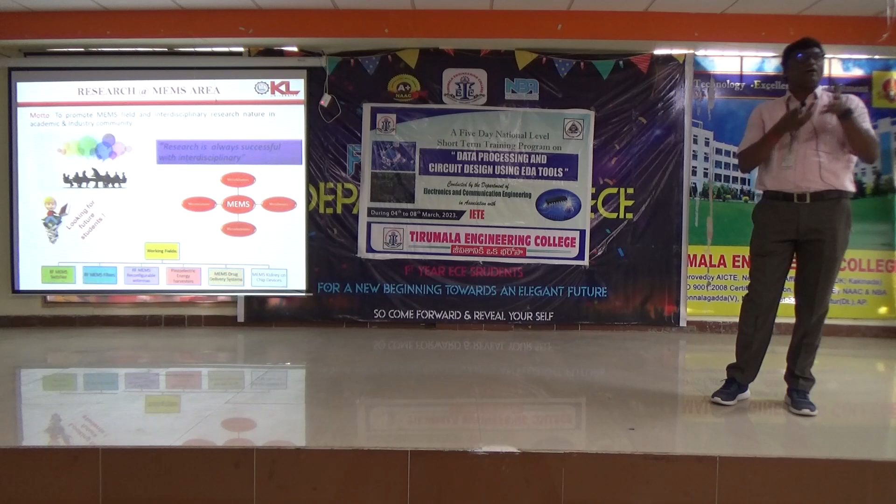But why unnecessarily should your drug be delivered to so many organs? You are having some disease in some location, so your drug should go into that particular location so that location gets cured. But when you take a tablet, it dissolves in your stomach and later moves on to every part of your body. Some chemical will go to the heart, some to the kidney. That's why whenever you have a headache or other diseases, you cannot take certain tablets, because they will damage your kidney and other parts. So our intention is to deliver the drug to an exact location of the body.

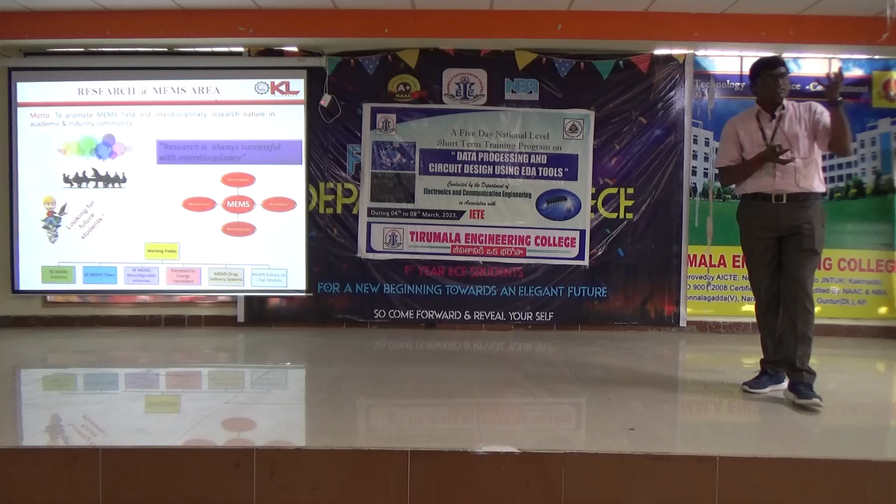Suppose I want to give some drug into this location, and I developed the chip. The chip I will place here on the human body. Therefore, later on, this drug will be injected into the exact reserved location. Therefore, organs that don't require it are not affected by unwanted substances or chemicals.

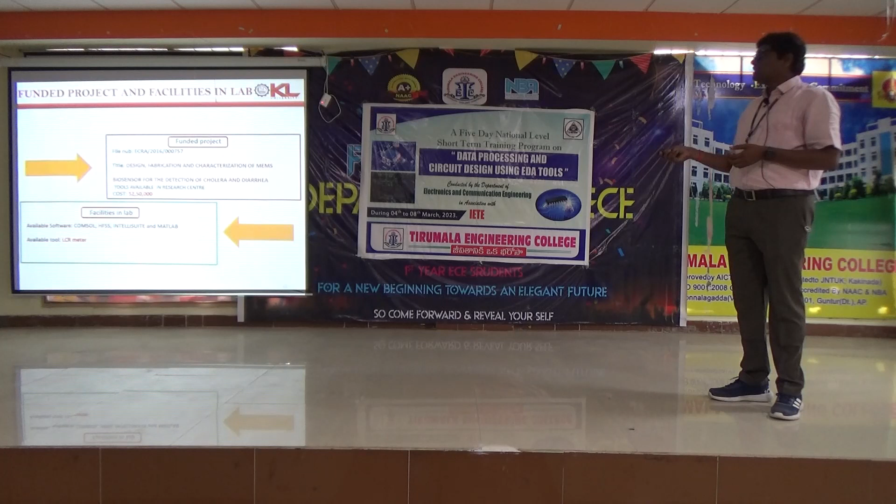These are the areas we have worked in, and we have a couple of faculty working on this. I am running these at KL University for many years now, and these are the people who have done their PhD from different parts of the country. We have some funded projects and some tools available in our research lab.

With the help of the tools we are doing computational work, not experimental, because experimentation is connected with so many aspects. It requires samples, permissions from the government, and we have to approach doctors and others. That's why whatever we plan, we execute with the help of tools like COMSOL software, IntelliSuite, HFSS, and also the TCAD tool.

With the help of these tools we are doing our work, and these are the people behind me working with me. Because of them I am able to solve so many research problems.

All these people, almost everybody has got their doctoral degree. There is a person who is now in CBIT, this person completed his PhD, she has completed from Vignan Jyothi, and he completed from Central University. So these are different people. This person worked on antennas, he on MEMS, he on RF MEMS, he on bio MEMS, and he on FinFETs and RF MEMS.

For their PhD program they have done this, and one person cannot do research alone, we always need collaborations. That is the reason your principal called us, because you want to collaborate with KLU and also with NIT. Then only your institutions will get some fruits.

I also collaborated with some people, and from all these collaborations I have arranged talks like this in my institution. Some talks are online, some offline, and we have acquired knowledge from them, understood some of the facilities required, and utilized them in our institutions.

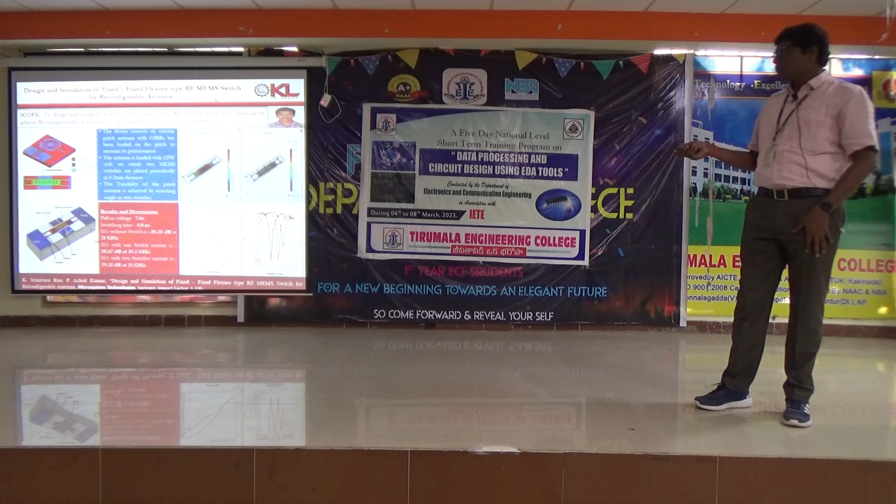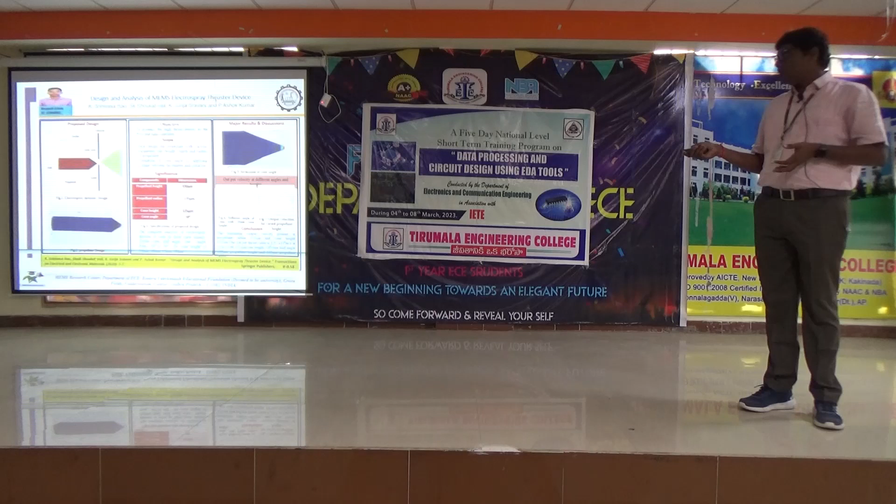These are the models we have already done, and these are the projects we have already completed. All of this is published in high-end journals like IEEE, Springer, Taylor and Francis, and elsewhere. Whatever work is done in my lab, my target is always to get it published in high-end journals. So these are different models based on MEMS, nanoelectronics, and nanotransistors.

This is one of the areas where we are working, the autonomous mobile robot. The robot is able to move forward and track something, lift something, and bring something to exact locations. Most robots nowadays in indoor applications are used for service purposes, and this is one such model.

We have developed the FPGA-based architecture for this implementation, and that is the PhD work of this person, she is from DVRIT. All these models are finally available now in IEEE Xplore.

That means all are published, and we also organize events like this. Otherwise we cannot achieve all these credentials in our department. Every year we bring people from IIT, NIT, and from abroad, show our models, and if we want something we try to get their help also.

That is the reason we have done all these many of the things. So far the number of international publications I have in my lab under my name is 185. In fact it is 189, I think. 189 publications is an imaginary task for a single person, but because of collaboration, because of some planning, something like 189 publications is there on my name. You can search in Google, KL University, you will get it. All my 189 publications in the Scopus database are published in these journals.

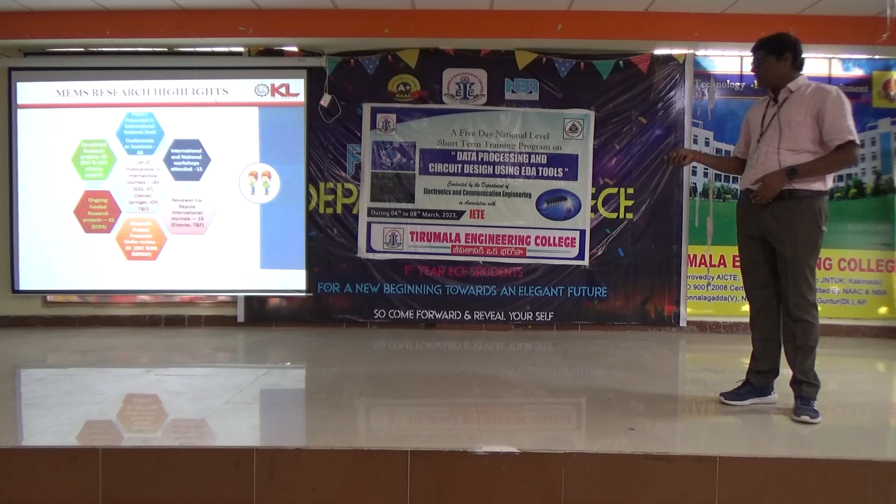I have also completed some funded projects, attended some workshops, some guest lectures, some conferences, and 7 PhD students completed, meaning everybody has to work for 3 years. Once you work for 3 years, your work will be published and patented, and then you will be awarded the PhD and can go into the market. So 7 people have done it with me, and a few more are working.

One or two students is also fine. The package for Mentor Graphics is 18 lakhs. A core company offering 18 lakhs means you can understand your life even after some years. Like Bosch is also there. Bosch has recruited around 300 students from KLU, and some of the students got Bosch through online. Through online, there are so many industries now opening their calls. All of you have basic electronics. Wherever you go to attend these, all the companies are asking simple basic electronics, simple basic EDC, simple basics of your electronics.

So this is all about my talk, and if you have any doubts you can ask. Otherwise I would like to thank the conveners who called me for this event, and thanks to your head of department, your principal, and thanks to my head of department Dr. M. Suman, and also my management Sri Koneru Satyanarayana Garu, for providing this opportunity to discuss some of my research work with you. Any doubts you have? Now the forum is open to discuss.